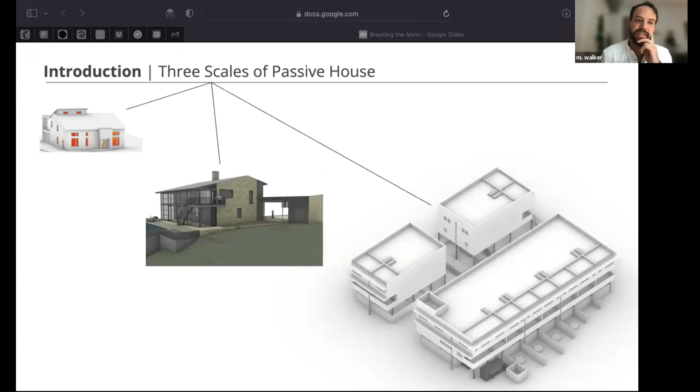So we were trying to think of how we could slice this in a way that could be more broadly applicable. Historically, Positive Energy has built its reputation on being building science consultants, but also doing MEP for really high-end homes. We've always had a deep passion for Passive House and have been working really hard to move it into the market here in Texas, as well as other hot, humid climates. But historically, it was just difficult to make that a business model because there wasn't a lot of demand. But we're very, very passionate about the work that we do.

And so we saw a clear need for a deep level of MEP coordination and building science consulting for high-end homes. And over time, we've tried to position ourselves so that we can make our services available for projects at different scales and of different budgets. And so a neat way for us to explore how we've done that is to focus on these 3 different projects, 3 different scales, 3 very different budgets, 3 very different programs, all Passive House projects, and all projects where, luckily for us, the owner was super interested in making this possible. So that's key factor number 1 to start working into your mind, is that there are owners who are aware of this stuff, and programs like this really matter in educating owners on what is possible.

So the first project that you see on the top left is a house that any of us would live in, right? A normal family wants to build a high performance home. The owner works at a university in Fayetteville, Arkansas, and essentially wanted to try this out as a test case to see if he could become a Passive House builder. So there's a lot of learning to do. Found an architect, but the architect had never done a Passive House, was a little unsure about where it was going to go, how it was going to work. The house you see in the middle is a super high-end luxury residence on Lake Austin here in Central Texas, which, if you've never been out there, it's lovely, it's beautiful.

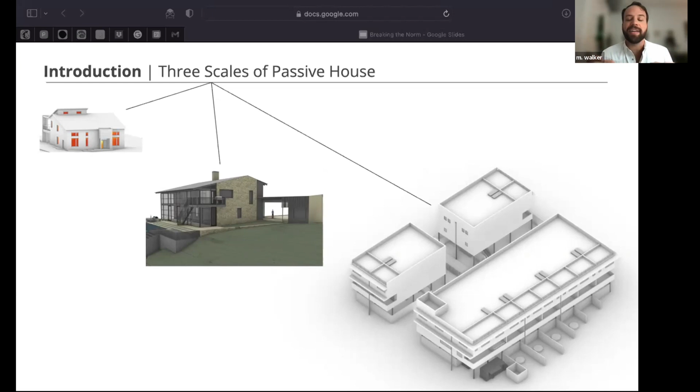Absolutely. So that's sort of thread number 2 to start tracking here: first of all, the owner is interested, and second of all, these are sort of like hands-on case studies for the local market, and that's a really big deal where Passive House is not normal. So start internalizing that and think about where you interface with Passive House projects in your market.

Okay, so how did we help? What did we do? We had to break the typical architectural design process. Typically, when we would engage for MEP services on projects, we're often getting brought in at mid to late DD, frankly. They're on the downhill slope to construction documents. And if we're talking about pulling big levers that have everything to do with architecture and very little to do with the systems that are later specified, that's where Positive Energy wanted to make impact.

And so we said, how do we do that? We want to front load our thinking. This is the MacLeamy curve. If you've ever seen that before, Patrick MacLeamy at HOK came up with this idea. Christoph always uses the 4 E's, I think: everyone engaging everything early. That's a nice little catchy phrase that you can think about. But we were trying to process how we could do this, right?

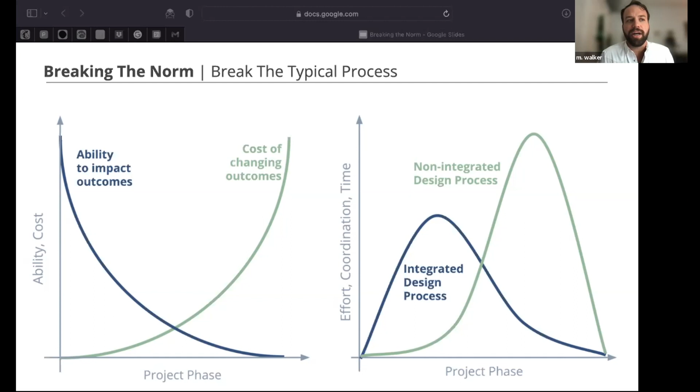How to leverage the expertise that we have at Positive Energy and even bring new value, new services to the market. And Kate has been absolutely instrumental in building that side of our business with these 3 kind of ontological groupings of consulting that we do. And I'm going to let Kate kind of talk through those for you.

So we've divided up performance consulting, which is what we call the early phase of design, into 3 different categories. And this first one is passive. So while the architecture is still relatively malleable, we like to go in and give the architect and their team a gut check to see how well the windows are placed, where the radiation's coming in, if there's going to be too much light in any given space. That also usually directly translates to too much heat in any given space.

So it's really helpful for us to help architects understand where those problem points could be before they show their design to a client and the client falls in love with it. Next, we like to talk about mechanical systems. So always our ultimate goal with mechanical systems is to create superior indoor air quality and deliver heating and cooling.

But the biggest barrier that we've seen in the engineering design phase is that we don't have a lot of space. And so in the active system portion of our scope, we tend to look at the plans and see where mechanical systems could go, where they make the most sense, and then also point out any areas of potential challenges and concerns for ductwork to pass through.

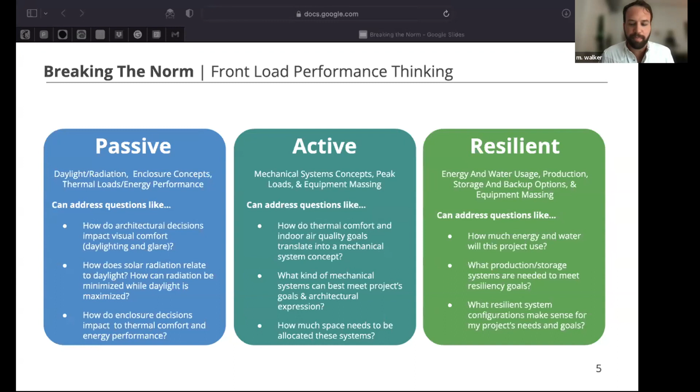So enough about this. Let's talk about the projects. So Kate, you want to describe this first project for us? Just give us some context about what was going on with it. Sure. So this is a smaller single family home in Fayetteville. And as we mentioned before, this was the most budget constrained project. This is not a multi-million-dollar house with lots of money to throw around. We were sort of doing what was within the realm of possibility for the owner. And this will absolutely be one of the first passive houses in Arkansas, which is why the owner is really excited about making it an educational component as well.

He works closely with the university right now and is interested in bringing some architecture and engineering students in to check it out and see what's going on. The architecture team also didn't have a lot of familiarity with Passive House. And so they brought us in at the earliest level that we do, which is that daylight and energy analysis, to look at how well the house is doing, and if it's sort of in the striking range of what Passive House would need to be.

Yeah, and it's also the case that the owner of this project is one of the sweetest human beings I've ever met. If he's on this call, I don't know if he is, but if he is, hi, it's good to see you.

In our outline, we were kind of framing this with what's the big question, right? And so the big question for this project, he said, well, okay, what is the most economical way and best way I can connect Positive Energy with my architecture team to understand how close I am to Passive House? I want to get in striking range. And so passive systems analysis, that daylight and thermal comfort modeling, and kind of a broad look at his enclosure strategy was where we landed.

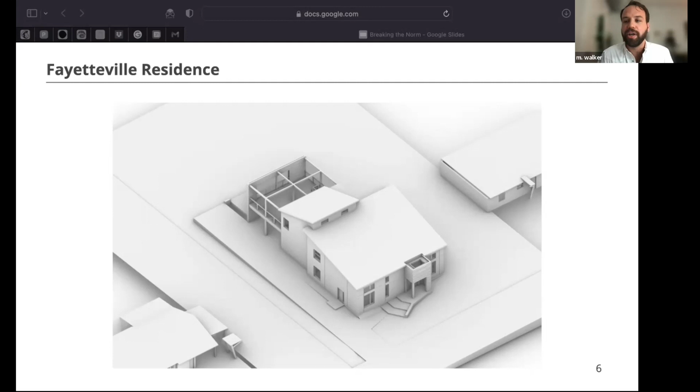And so briefly, you can see just kind of a smattering of some of the graphics from this analysis that we do. And giving feedback at this early phase was so important, and we'll illustrate why. So Kate, why don't you talk a little bit about the window to wall ratio outputs that we learned about this project and what that meant for them? Sure. So this project decided to go with a Passive House prescriptive method, which meant that they needed a window to wall ratio of less than 18%.

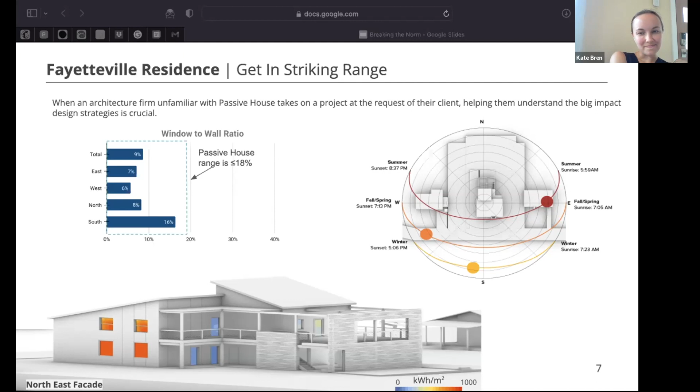And with our analyses, we actually discovered that they were being really conservative and had actually overcorrected for the amount of glazing that they needed. And so they were actually able to add more. And that's a really exciting thing that we get to say. I think this is the only time this has ever happened, that they got more glazing based on our analysis. Yeah, it's pretty fantastic. And just to clarify for everybody, all three of these projects that we're talking about are PHIUS projects, not PHI.

And that was awesome because it showed the architect, like one of the biggest criticisms that we'll always get when we're talking to somebody new about Passive House is, well, that's gonna keep me from being able to daylight my spaces the right way. They assume that we're trying to build a Yeti with no windows whatsoever, and it's like, no. It's artificial to think of architectural design and the daylighting component of that and the thermal performance of the design as mutually exclusive. They are the same thing, and they have a very interesting and unique relationship that needs to be considered and needs to be evaluated quantitatively. And so that's what we were doing in this part of it.

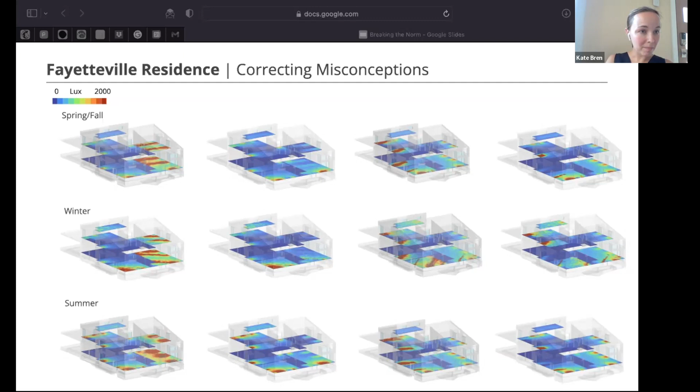No, you're good. Yeah, I'll add one thing, which is that from my perspective, when we do, as Miguel was talking about, flying around the model, looking at a table on Thanksgiving evening, it really brings the clients and the architects into the work that we're doing, and it gets them really excited about looking at these analyses. It takes an architect from thinking, oh, I know how to do daylighting, all of my windows are perfect, to, hey, here's a really big red spot. And you're not seeing a lot of that here. You're seeing the opposite, which is what we worked on to help them.

And so helping architects contextualize this through different strategies of external shading, like thinking about how they might make it operable on a seasonal basis and that kind of thing. It's a really fun place to explore. And Kate has done a wonderful job of actually building a lot of architectural precedents that we'll talk through with different firms when we go through this process, so they can see we're not just proposing this abstract thing, we're actually bringing it to design thinking from an aesthetic perspective as well, which matters a lot, right? These people are spending a lot of money to hire an architect to bring this project to life. They want it to look beautiful, they want it to perform beautifully, and we want to help them connect those dots.

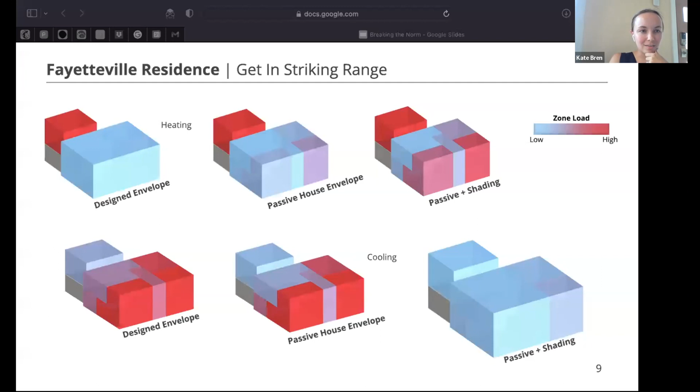Absolutely. And that's a nice segue into this next one, where when we got involved with the project, it was a glimmer in someone's eye. It had barely been conceived of when we got involved. And that was really great, because it was an owner who has plenty of money and wanted to really throw everything but the kitchen sink at it to figure out how they could make this the best house they could be. And the big question for them was, how do we reconcile the fine architectural detail that the firm that we're working with demands with my robust performance criteria? And that's why they engaged us. We have a lot of experience in both the high performance and high end space, and so it was a natural fit.

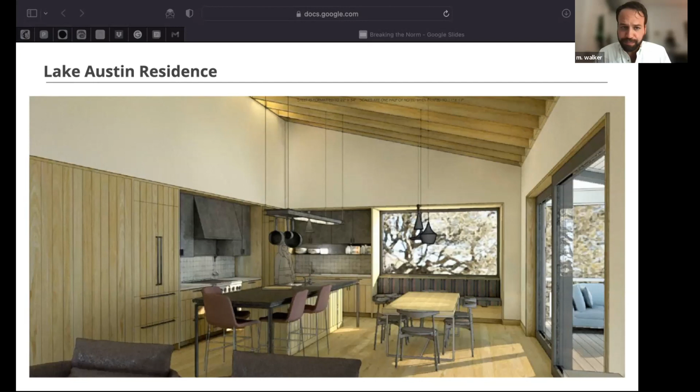The owner was not particularly interested in achieving passive house certification. That wasn't a hard and fast criteria. And I think a lot of that in early conversations was driven by the fact that the architecture firm had never done a passive house. And so they were sort of relying on us to navigate this communication with the client about what that means, right? And so when they brought us in, we were literally figuring out block forms with them.

Absolutely. And what was great is just like in this early part of the design process with the architects, several members of the firm we were working with were just super interested in Passive House and have since gone on to attend different Passive House conferences, and we have conversations regularly about it. We were also, because we were involved at this early stage, able to get a builder on board who is a fantastic Passive House builder.

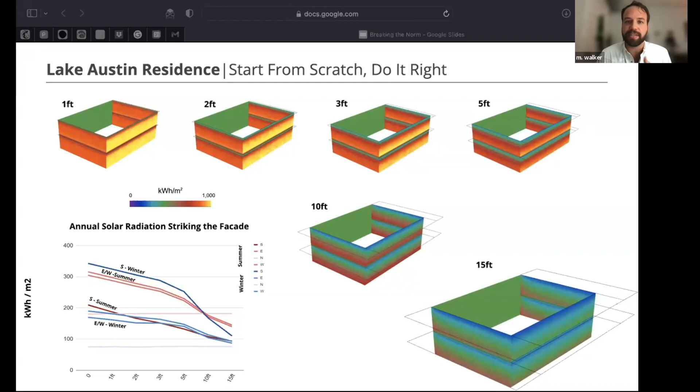And even in Austin, right, we kind of present as this progressive place full of building science forward, but it's a huge market, and it's a market where there are a lot of builders and a lot of architects who haven't done this before. And so it is very much an emerging market, just like Fayetteville. And so having the confidence instilled by having a great builder involved, having a consultant like us doing this analysis early, actually allowed the project team to start thinking through what their baseline might be with confidence, right? Like if we do this, we're pretty confident that a builder can knock this out.

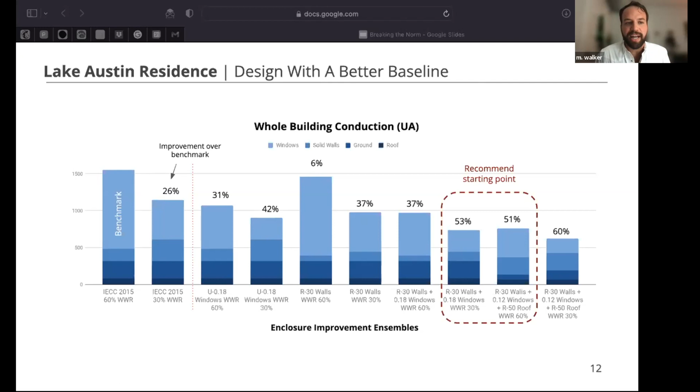And you guys have brought someone into the picture at this point that we think would be a great partner in it. And so, understanding their aesthetic goals, how do we balance this out through the performance path for PHIUS? So that they're in striking range. And that's really what we were playing around with a lot of this passive systems analysis. And as the form got more complete, we started looking at aspects of resiliency. And so as Kate was describing earlier, we're looking at solar, we're looking at batteries, we're looking at rainwater collection, and we're looking at how to make all of that make sense for the specific market that we're in.

Okay, you want to talk a little bit about the way that we sized and placed the solar panels on this project? Sure. So as you can see on the left, we offered the team 3 different options for where to place the solar panels. And the architect was really excited about putting the solar panels on the south-facing roof, but not so much about those other 2 options that we offered. But you can also see on this page that the south-facing solar panels are only offsetting 67% of the amount of energy per year that's being consumed by the house. And so that was an issue that they wanted to address.

And so that was another opportunity for us to go back and look at the enclosure and say, okay, well, what are the levers we can pull to make the consumption less, to be more in line with the generation? And also this brings into play the conversation about outage preparedness. So because the house is solar limited, it doesn't make sense for the owner to shelter in place in the entire house. So what we recommended they do instead would be to shelter in place in the garage apartment, and then have some Powerwalls to meet those needs there as well.

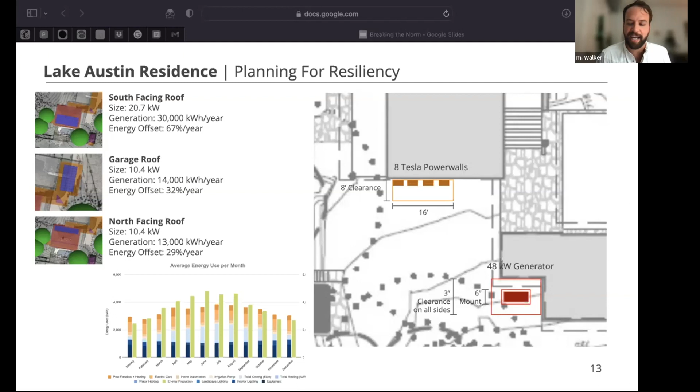Absolutely. And what Kate's pointing at is, we went into a much deeper iterative process, which we can do with firms that have projects that are higher budget. And it was such an educational experience for the architects and for us to learn how to work with architects in this way, who want kind of soup to nuts consulting. And it actually led to really fantastic outcomes in the engineering sense, because we were really well set up. We did the active systems with these folks as well, and kind of went through the spatial dimension, mechanical massing process with them. And it set us up really, really well for fluid engineering. We did mechanical, we did plumbing engineering on this.

through the renewable and backup systems to the panel, sizing it, and then making it such that there are panels or elements of the panel that can serve those islandable facilities that Kate was describing. So when they go to the guest house, the garage apartment, if there's another snowpocalypse in Austin, they know exactly how to make sure that that operates.

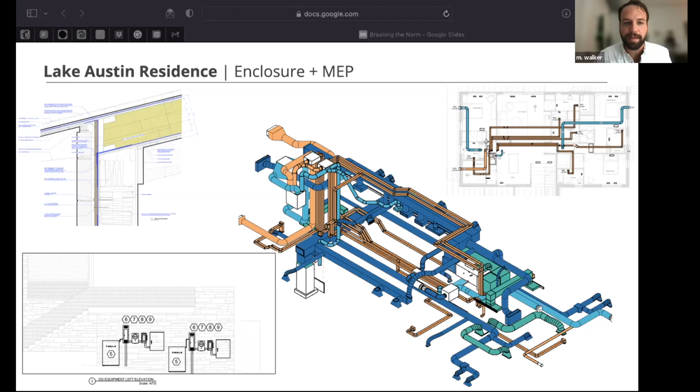We're gonna talk about the third project. This was the hotel, hospitality / multifamily building in Galveston. Very unfamiliar with Passive House in the Galveston market.

If you've never been to Galveston, it's a nice place to go. Texas beaches don't hold a candle to the East Coast, Florida, West Coast, but they're a lot of fun. And if you're careful, you won't get run over by a pickup truck when you go to them.

So the context of this, I touched on it a little bit earlier, and Kate, help me remember if I forget something. But the owner was a developer funding this project himself. He was very excited about Passive House and wanted to create this educational opportunity for everyone who stays there. So there's actually going to be ways that they guide their guests through the experience of what that space is. And that's really a lovely way to introduce folks to the Passive House concept and what it feels like to live in a space like that.

It had some unique architectural programming. They had multiple spaces that were not necessarily residential or particularly hospitality or commercial. It was sort of a mix of all of them. So we had some navigating to do around code books and figuring out what all that meant. And we got brought in actually after another consultant had already done a similar process to our passive systems analysis and was also doing enclosure consulting.

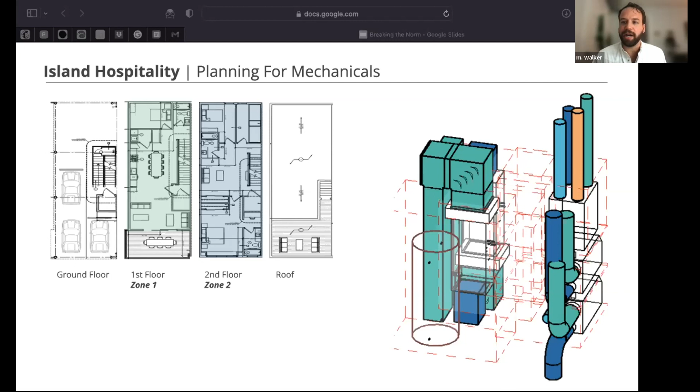And not only just thinking about where the equipment can go, but making sure that there's space for installability, serviceability, this kind of thing. So in a way, through this mechanical programming process, we're describing to the team what a mechanical core pod could look like. And then they can build that into their own model and start to figure out where it might make sense. We also comment on distribution.

So, my slide didn't change.

There we go. We comment on distribution, and not necessarily duct sizing for them, but talking about the max size duct clearance they would need through structure, how to think reasonably about it, because often it will run into situations where someone has provided space for mechanicals, but structurally it's impossible to get out of that space. And so how do you actually serve what you need to in the building with ductwork that can't move anywhere? So just thinking through these things when the model is very fluid is a huge way to move the needle towards something that's very installable, that's very buildable.

And it's also a really great way for architecture firms to start to internalize how big these systems are. I think a lot of times it's guesswork, and sometimes it's great guesswork. Sometimes it's based on previous experience, but getting quantitative feedback on these things with engineering oversight without diving into the full financial commitment, especially on a residential project, for a really robust Revit model and engineering process.

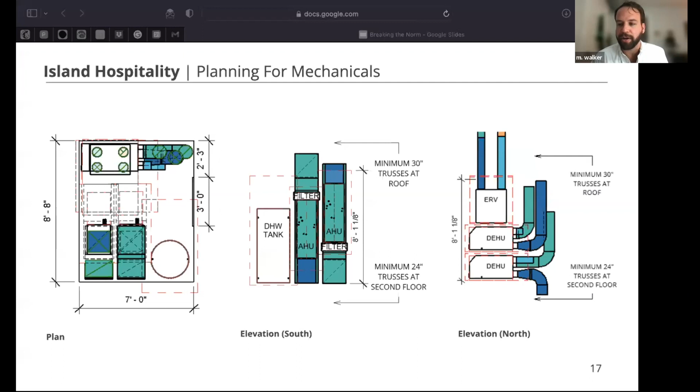They get the data they need, and then this is something that a design-build outfit could take off with, or we treat it like here's a schematic level mechanical concept and then hand it off, like Kate mentioned, to an engineer of record to actually go through. And we've done it both ways. It's a lot of fun to play with that both ways.

Absolutely. And what's really lovely about this concept is that the owner is really thinking about the community and context in which this is placed, even though it's a hospitality project that's aimed at tourists for the most part. He wants food trucks nearby. He wants this full sumptuous experience that actually adds to the neighborhood that he's building in. That is a source of pride for the community, because it is a place of refuge both for guests and for neighbors in situations where it's called for.

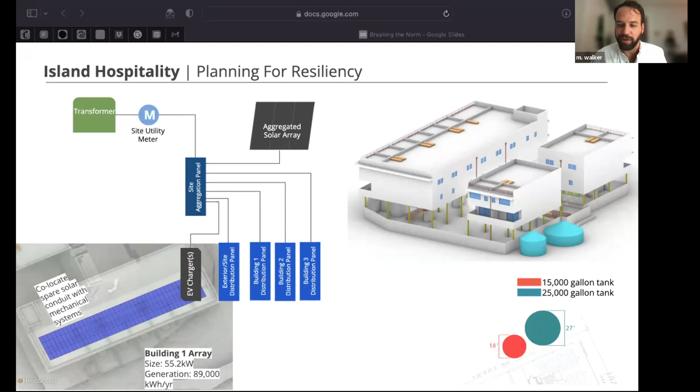And so to summarize, we at Positive Energy, we love to dangle carrots. That's our big thing. Even for projects that have a tremendous window to wall ratio, walking someone through the process of understanding the impacts of that and what the trade-offs are is so much more powerful than just telling them they're wrong, telling them that this isn't something you should do. And it allows people to arrive at those conclusions on their own, with informed data at the back of the decision-making matrix.

And it's part of the reason that I really love working at Positive Energy. I wake up and I feel great about my day, because even on a tough day, I get to talk to people who are actually trying to move the needle in the right direction. And that's a really, really fun thing to do. It means a lot to me. I don't know what I would do if I didn't work at Positive Energy. Maybe I'll go be a stage carpenter again in San Francisco, or a monk or something like that.

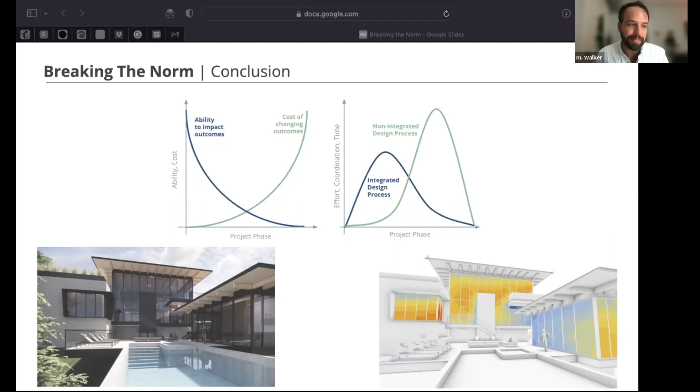If you want to learn more about how we relate to buildings, we believe that they should be places where people can thrive. And that means everybody engaged in the design and construction process, people living in them, the people that are impacted by them.